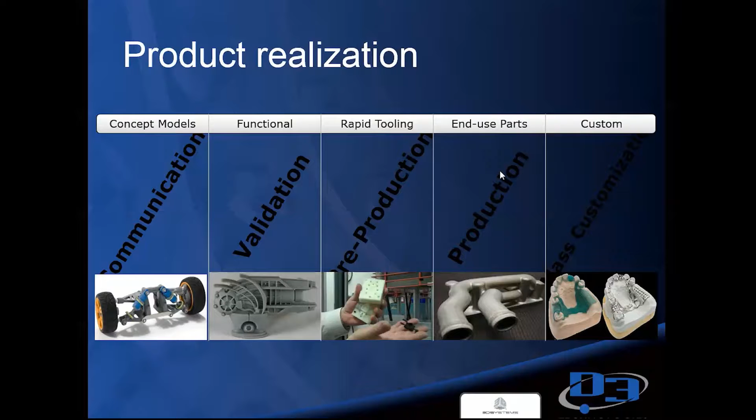Let's move on and talk a moment about rapid tooling. The whole point of rapid tooling is faster time to market. You can do fast patterns and mold printing much earlier in your whole launch process. As product development converges on the final design, your attention turns to the manufacturing startup. This stage often involves significant investment in tooling, and as you know, it's not an inexpensive process, it could even be expensive in the way of jigs and fixtures to help manufacture the new product.

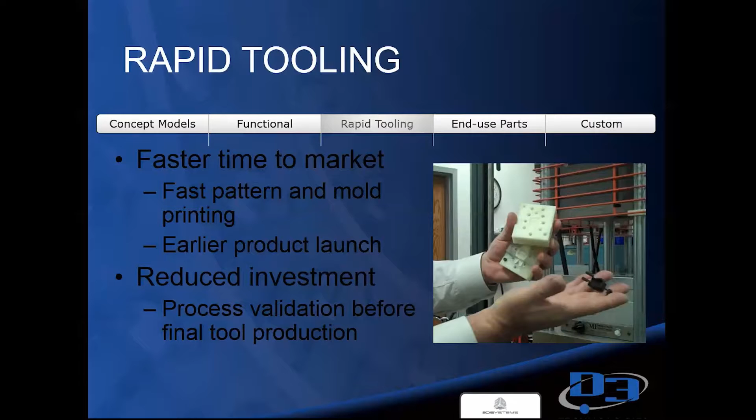At this stage of rapid tooling, the supply chain typically expands with purchase commitments for raw material or other components, and lead time for these required items can stretch out time to market with your product. So 3D printing, in a variety of ways, helps reduce that investment risk and helps you shorten your time cycle for launching a product. The whole point is to really reduce that investment and start your process validation before the final tool production process begins.

Processes that really benefit from 3D printing are listed here: injection molding, jigs and fixtures, RTV molding, hydroforming, thermoforming or vacuum forming, and investment die casting. This is a recap of all the rapid tooling processes in which 3D printing solutions are used to reduce your time and costs to produce parts.

For those processes, 3D printing can provide the master pattern, which is kind of the sacrificial pattern or the mold itself, in just a few hours in most cases. 3D Systems printing solutions offer great accuracy, fine details, sharp edges, surface finish, and appropriate material properties. Material properties play a big part in this, helping surpass the complexity capabilities of traditional methods using CNC equipment.

Your injection molding or direct mold production can be accomplished from plastic or metal 3D printing with integrated cooling channels. For jigs and fixtures, those are custom 3D printed jigs and fixtures. RTV molding allows master pattern production for RTV molding. Then you've got hydroforming, which is direct die mold production or negative mold printing for epoxy tool pouring.

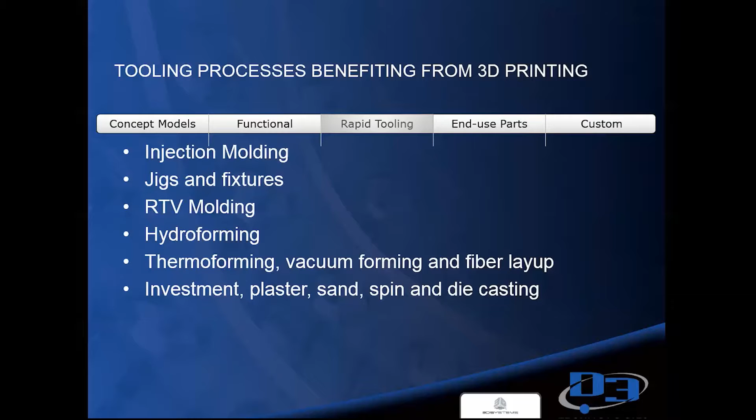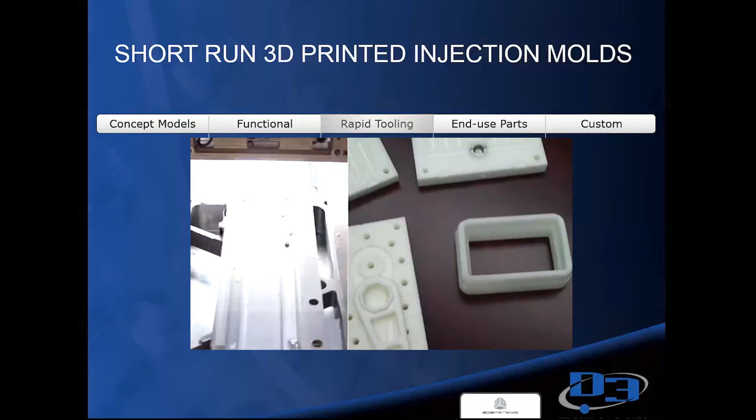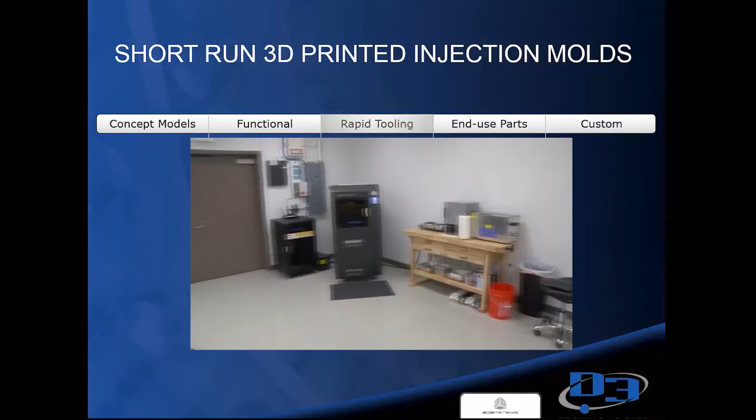3D printing is really a tool that's become available to the masses, and I think it's got people thinking about things again. We've used our 3500 HD Max to print injection mold tooling. We currently have 3 of the 3500 HD Max machines in the organization and expect to buy more. It's really helped us tremendously in terms of being able to help our customers do more, faster.

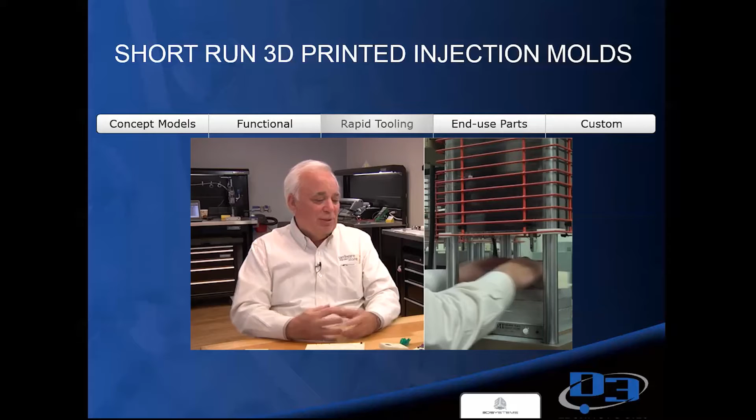Traditionally, if you want a molded part, you buy a metal mold. It'll take 2 to 3 weeks to make it, and cost $6,000 to $7,000 depending on the part. We were able to take the exact same part and reduce the manufacturing time for the mold from 2 to 3 weeks to a day - 12 hours.

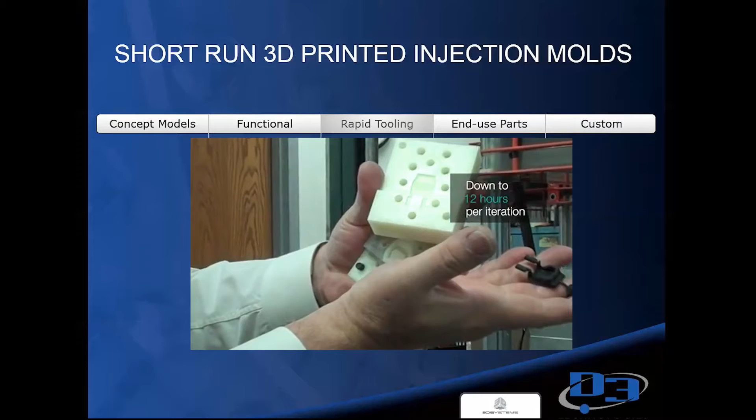If we get files in the afternoon, we can ship parts the next day. This particular part - the customer's usual cycle for tooling was 2 to 3 weeks to get a sample, and after they released the order for the tooling, another 2 to 3 weeks. We did 4 passes of this part, 4 tests at the customer in about 6 days, including shipping.

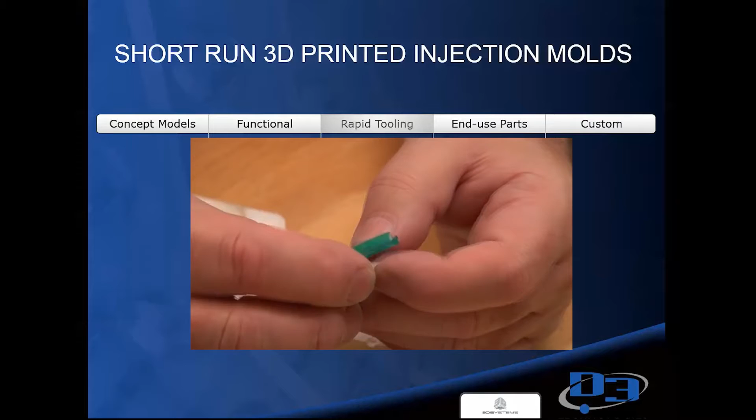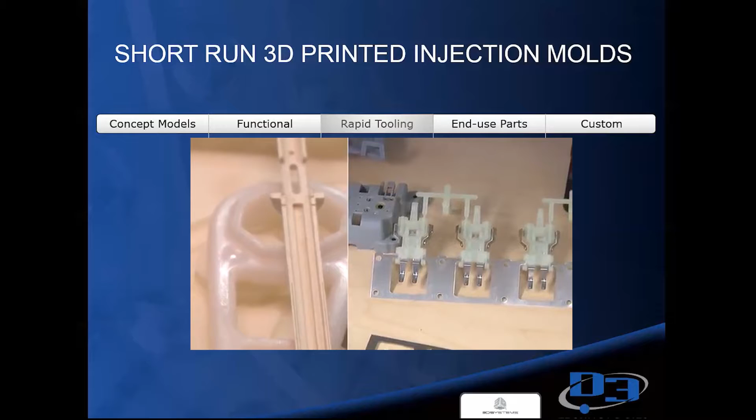So the customer doesn't have to make concessions in his design, doesn't have to cut corners, doesn't have to wonder would it really have worked if we had done it this way. Any part that we would want to do, we've been able to do with printed tooling. That's one thing with the 3D printers - it allows us to create things you would have just imagined.

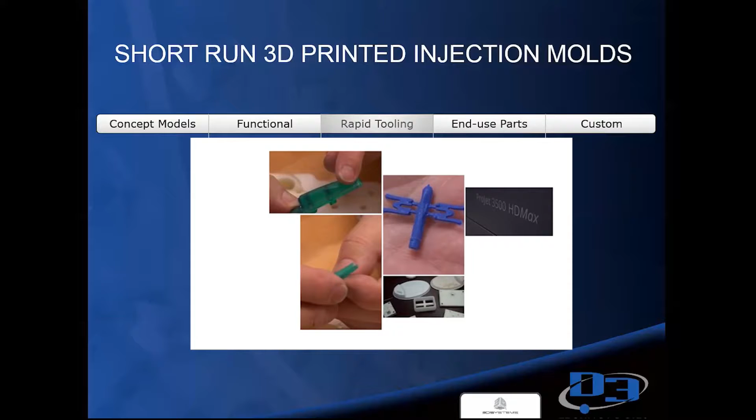This company is actually BioLink, a customer of 3D Systems. I wanted you to see this because they're a great example of exactly how injection molds are being done today with 3D printing. As mentioned, the time saving on this particular example - an injection mold was done in 12 hours versus 2 to 3 weeks for a metal mold that typically costs $6,000 or $7,000, sometimes more, sometimes less, depending on what it is.

And in this example, they produced 4 printed mold iterations in only 6 days with 3D printing. Customers can actually modify their parts, improve their products without the hard tooling costs and lead times.

The materials with 3D printing actually withstand upwards of 10 tons of pressure. With this technology, which is multi-jet printing technology, injecting at a temperature as high as 337 degrees Celsius, high quality to produce those actual production parts, allowing tiny little features. So it allows you to get more complex shapes more easily than with metal tooling undercuts and inserts.

Hard tooling production can really be accomplished with our direct metal printing. This is 3D Systems' direct metal printers. The beauty of this is you can really design - as I like to say, complexity is free, with no geometry limitations, right? And it's certainly much faster than your multi-step CNC.

In this example, this is actually built on our direct metal printing, the ProX 300 from 3D Systems. It's 12 inserts that were printed in about 50 hours. If you'll notice, they got very smooth vertical walls with a special build style, so the undercuts are there without any supports needed.

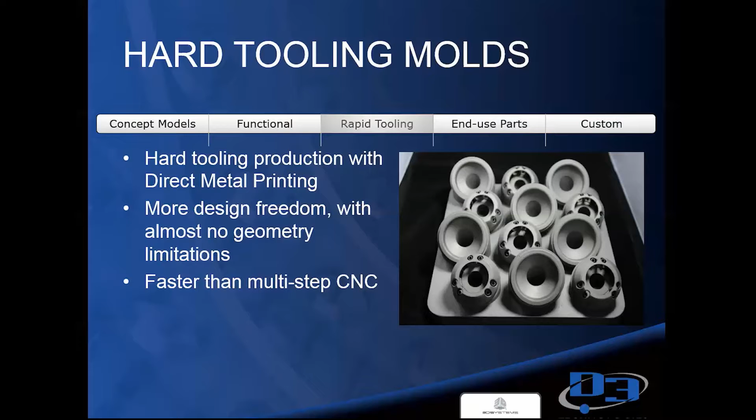This is an engine development example. With our multi-jet printing technology, Honda reduced design to manufacturing time by about 4 weeks, enabling more design iterations from CAD to metal parts in 2 to 3 weeks. There was no need to create injection wax tools, and more improvements were incorporated into the design due to the additional iterations, resulting in improved engine reliability with no design limitations. It reduced up to 2 weeks of design time by eliminating the need to incorporate draft and remove undercuts on the components.

Another example involves Honda's racing company within North America, Honda Performance Development, the single engine supplier to the Indy Car Series. They also lease engines for prototype sports car racing in the American Le Mans Series (ALMS) and the European Le Mans Series. In 2009, HPD started a feasibility and concept study on taking a V6 production engine and turning it into a race engine. In 2010, the concept became the Honda Racing 2.8 liter twin turbo engine project, and Honda had only about 11 months to perfect it.

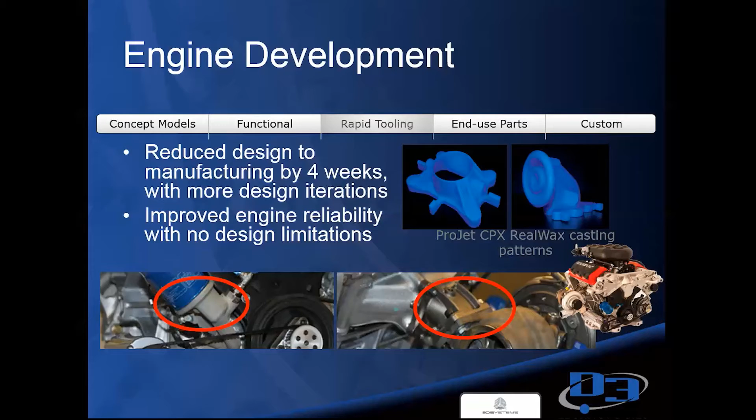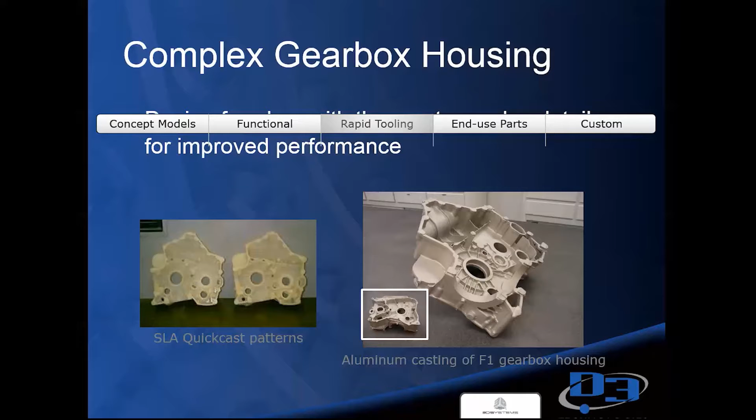Here's another good example: a complex gearbox housing. This allows us to use design freedom for complex details to get better performance. There are two applications here: on the left, SLA QuickCast patterns, and also aluminum casting of the gearbox housing. In this case, there was no negative implication or extra cost to adding the complex details, including conformal cooling channels running through the housing, which makes it impossible to produce with traditional CNC techniques.

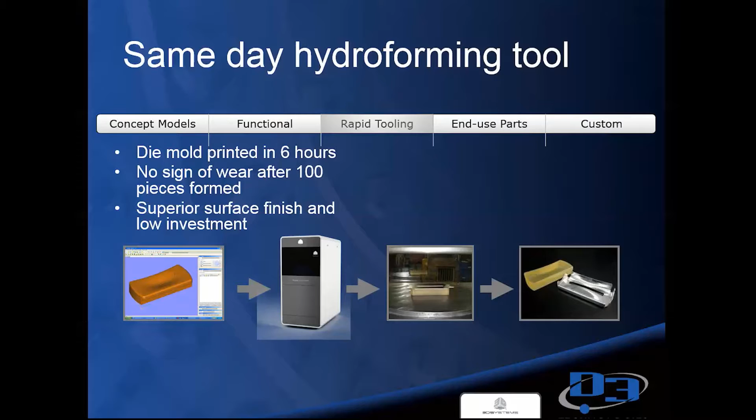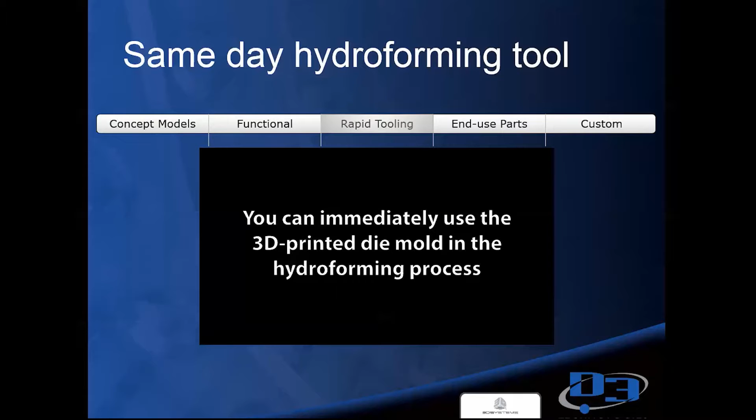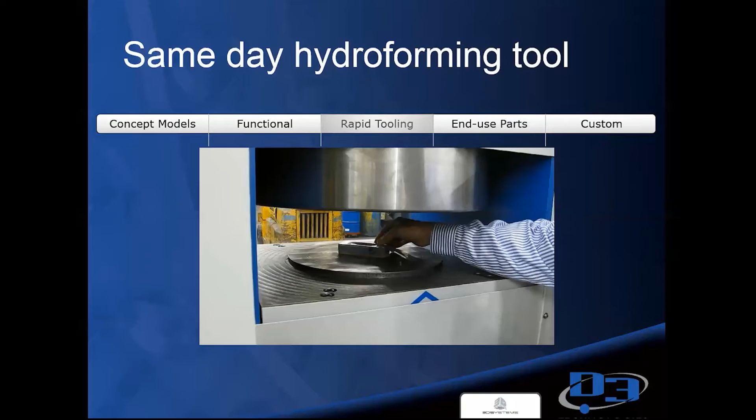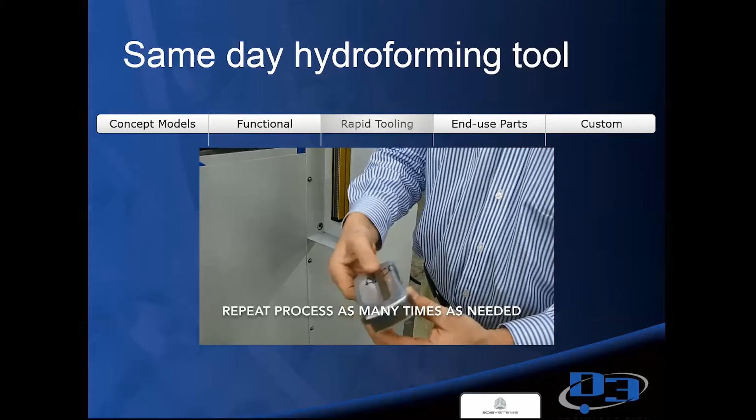This is an example of same-day hydroforming being accomplished on our 3500 series. You can see the hydroformed aluminum part, and you can repeat that process as many times as needed on that 3D printed part, which is done on our multi-jet printing technology. The beauty is you get tooling the same day—imagine being able to create a design and produce a 3D printed tool, starting that tooling the same day.

Let's turn to another portion of rapid tooling, and that is being used for assembly jigs. Assembly jigs are another great way for rapid tooling. In this case, this happens to be a customer of ours, Citizen Watch.

In order to maintain their confidential development strategy, Citizen really relies on their in-house prototyping division. Before they ever got their 3D Systems MultiJet 3D printer, Citizen used NC lathes in their machining center to create mock-ups of final watch designs and assembly jigs. Because this type of machining frequently adds costs and timeline delays, Citizen decided to explore their options into 3D printing and reduce the time and money spent on prototypes.

Their challenge was really improving their assembly jigs, which was typically a 20 to 30 day process at Citizen, and obviously it was very costly. So their solution was to invent a new assembly jig. Before getting their 3D printer, they produced one variety of assembly jig, but after they obtained their 3D Systems MultiJet printer, Citizen created new jig candidates, enabling them to make best suited shapes for required fits in the shortest amount of time.

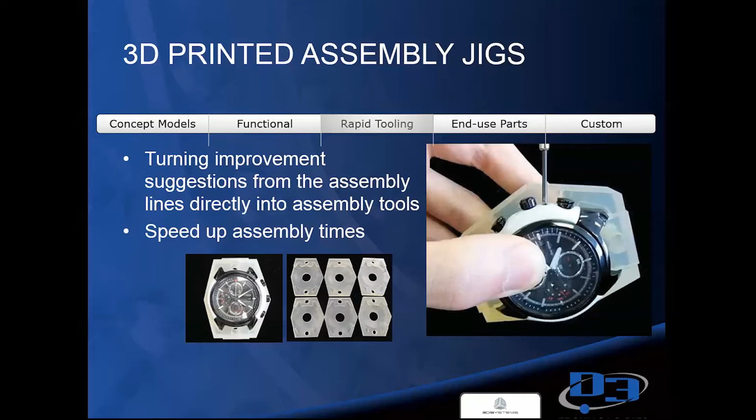Another way is using direct metal mold production with our 3D printing metal printers. You can also use direct plastic mold production with our stereolithography, SLA, and our MultiJet printers, the 3500 and the 5000 both. So at a fraction of the time and cost, you can do this today with these injection molds versus the traditional method.

Obviously, you're going to get excellent accuracy and surface finishes, fine details. Because of this technology, you can actually get high impact and temperature resistance plastics. For direct metal, you get higher volume production, complex shapes such as undercuts, inserts, integrated conformal cooling channels, and it's really fast, easy, and repeatable, which is all key for direct mold.

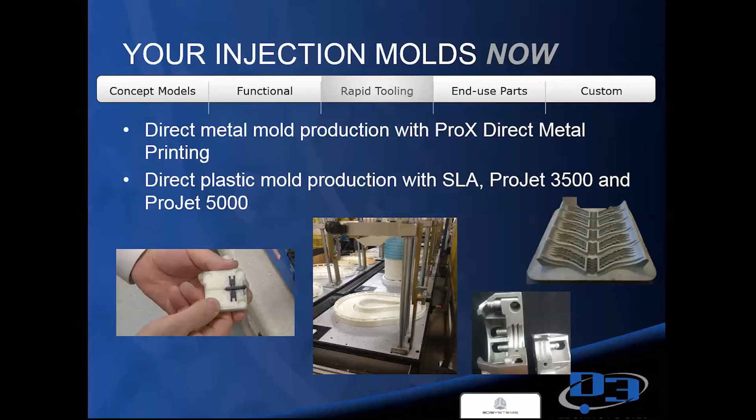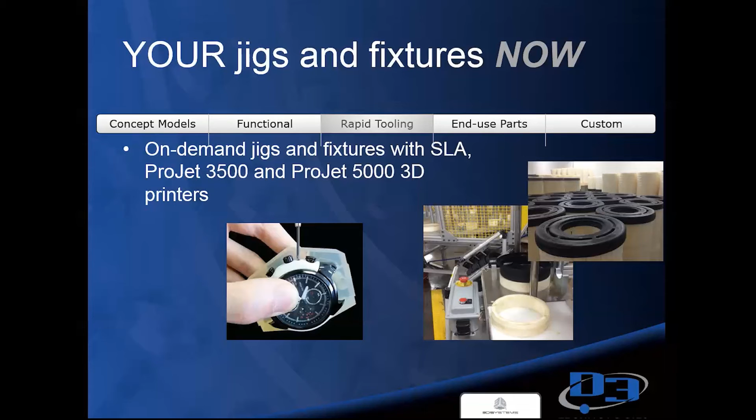Your on-demand jigs and fixtures you can do with our 3D Systems stereolithography technology for plastic parts, and then also with multi-jet printing as well. Either whether you choose SLA or MJP, you're still going to get the ability to do on-demand, customized parts without tooling costs involved.

If you're trying to get master patterns and die molds, you can accomplish that from very small, minute pieces to high precision master patterns and die molds, again with either our stereolithography or our MultiJet printers, 3500 or 5000 series.

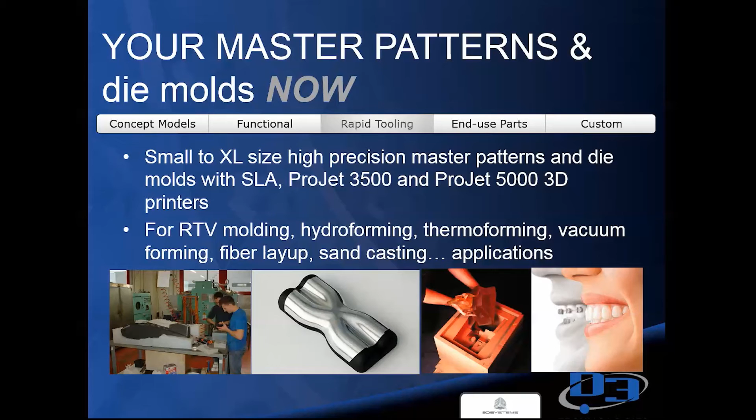These are really used for RTV molding. It's also used for hydroforming. Both these technologies are used for thermoforming and vacuum forming applications. You find a lot of this in the dental application, as I talked about. Invisalign, as you guys might be aware of, is clearly using our multi-jet printing technology for printing those Invisalign products out on a daily basis to the tune of about 100,000 per day.

If you want to talk about wax casting patterns, 3D Systems offers real wax patterns that can be produced. With high resolution, you can get highly accurate patterns, and then you can cast directly using your standard casting processes. Just imagine being able to go from your CAD model to a wax pattern to a finished cast metal part in a couple of days instead of a couple of weeks.

3D Systems has got some great solutions to help you adjust your specific requirements with a selection of our printers with high resolution and the build volumes and various wax materials to address your range of casting applications, using the 3D printed patterns in your standard lost wax casting process and equipment.

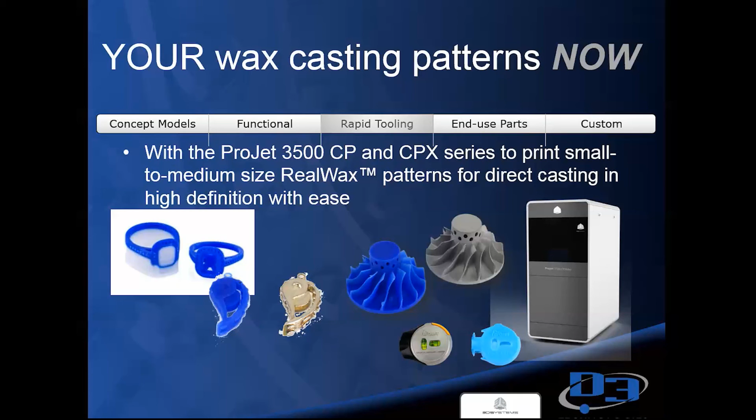So again, why do you want to choose this process, which a lot of people do use for jewelry applications as well? Because you get superior quality with wax patterns, high resolution, sharp edges. It's really intuitive and easy to use, and you can include that in your rapid workflow and improve your casting room efficiency and productivity right out of the gate.

If you're trying to do something very precise or small for direct casting patterns, we have another unit, our ProJet 1200, if you're trying to do micro SLA quality. Or we've got the ProJet 3500 more for direct casting patterns if you want high definition with ease. Or we've also got the stereolithography SLA printers to print the most complex shapes and intricate details from very small to very large casting patterns.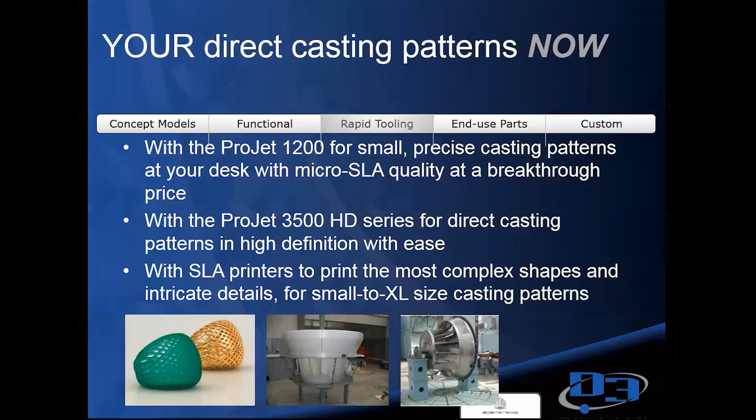Really, there is no limit to what you can do with rapid tooling today. We've talked about some various applications, whether it was hydroforming, cast patterns, or injection molds. So really, you've got various applications from the various technologies of 3D Systems.

Now that you guys have the tools here for 3D printing, it's really your turn to take it and start using 3D printing in-house to accomplish and allow you to reduce your costs and maximize your productivity. Thanks, I appreciate your time, and we'll see you on the next session.